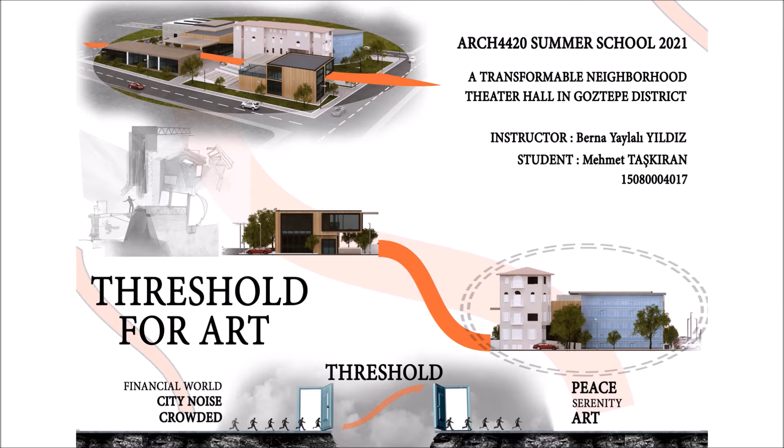Our project this term is a transformable neighborhood theater hall in Göztepe district. The name of my project is Threshold for Art. I prepared two diagrams to better explain the design process and main idea of the project.

The main idea of the project is the threshold. The idea of a threshold is a crossing point or road that connects areas and structures that serve two different purposes or work in two different ways. I used the concept of threshold in this project, working as a transition from Mithat Pasha Street, which is constantly busy, crowded, and commercial, to a peaceful place where art and education are intense, which will be formed together with the theater hall we were asked to design for our space.

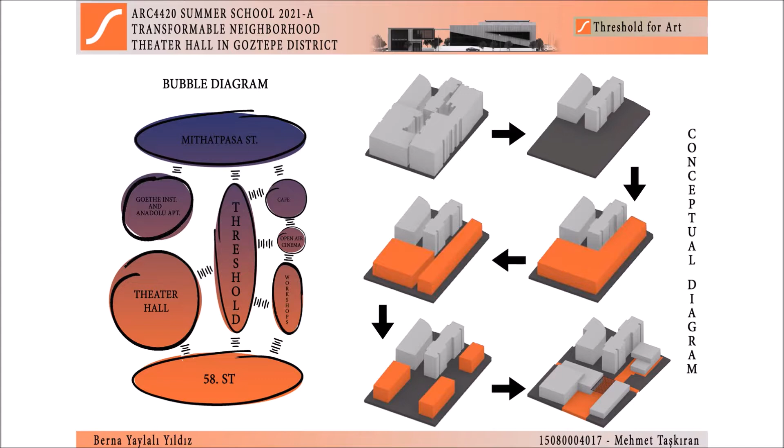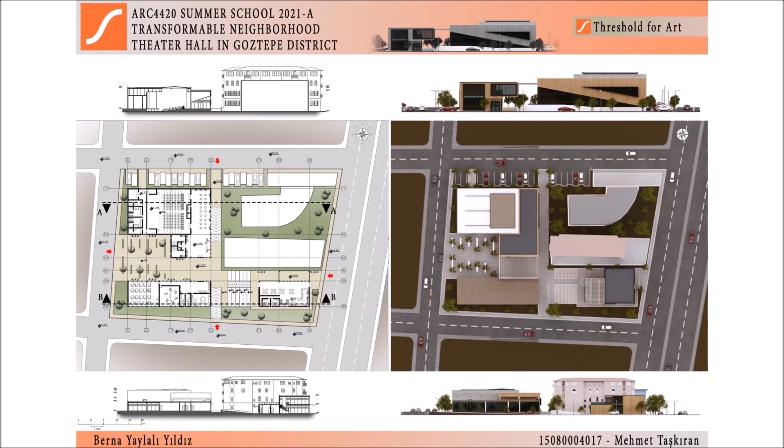I benefited from the analyses and field trips I made while making urban decisions about the project. When we examine the land and its surroundings, we see that the land is costly because it is located at the center of the city and near the sea. This has caused all the surrounding buildings to be multi-story. I also worked on a single floor for the majority of the project, both to break this perception in the environment and because people feel smaller in the city which is rising day by day.

On this slide you see my site plan. Since I don't want any accumulation in a certain part of the land, I positioned the structures at the corners of the land to create defined spaces between them.

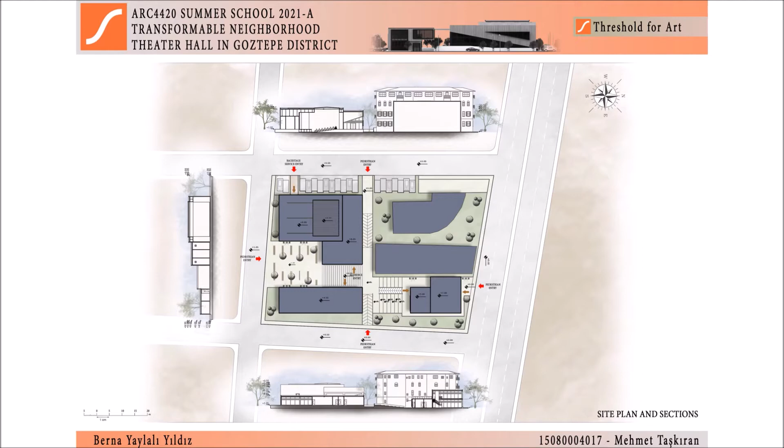When we move to the ground floor plan, we enter the land from the most crowded street around the land, namely Mithat Pasha Street, at zero level. There is a cafe bordering this street, with double entrances from Mithat Pasha Street and from the back for those coming from the theater side. The cafe serves 35 people with an area of 140 square meters on this floor. Thanks to the slope of the land, I placed seating steps at the back of the cafe and created a small open-air cinema by placing a screen on the back wall of the cafe.

The theater and courses are at a 1 plus level. This height is reached by ramps and stairs from three sides of the land. The slope of these ramps has been designed so that the disabled can move alone.

When we enter the theater building, we see the foyer area of 220 square meters. The theater hall is 315 square meters and has a capacity of 160 people. In the backstage, there is a storage room for the props and a service entrance for easy transport. At the same time, there are two storerooms separately for men and women and two player backstage.

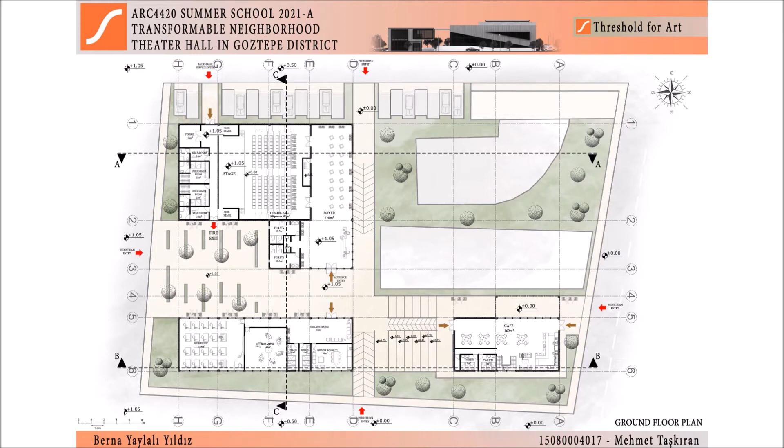When we examine the workshop building, there are staff rooms and toilets at the entrance. At the same time, there are educational course rooms that can be shaped according to the public's use, of 120 and 65 square meters.

As I explained in the part of urban decisions, there is only a first floor in the cafe since I don't want to go up elsewhere. With its terrace, it is 230 square meters in total and can serve 50 people. I also have perspective renders on this slide, so you can better understand the floor layout.

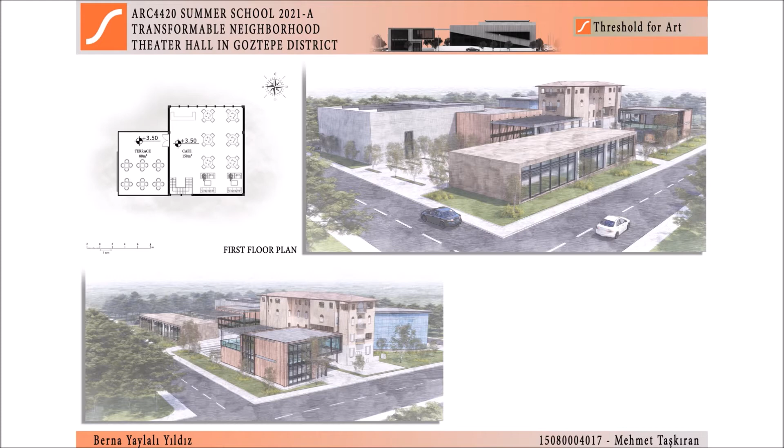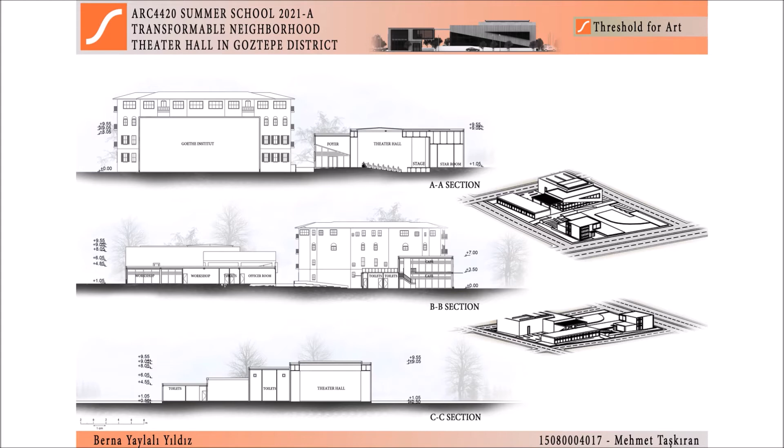When we examine the sections, we get more information about the operation of the theater. At the same time, we can notice the transformable material, which is one of the main elements of the project, in the sections. The situation that makes the project transformable is that the audience part of the theater can be opened when desired. How this works is also seen in the sections.

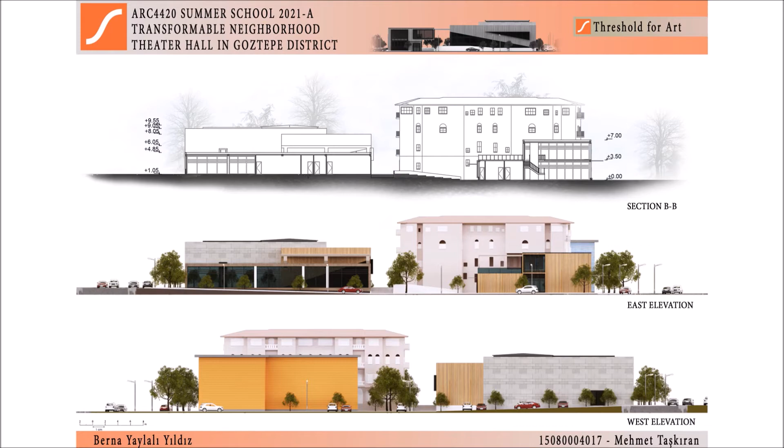On this slide, we see the facades. While doing the facade work, the elements I paid the most attention to were not to be under the shadow of the Goethe Institute while I wanted a modern and simple look, and not to put the Anatolian apartment in the background while trying to be under its shadows.

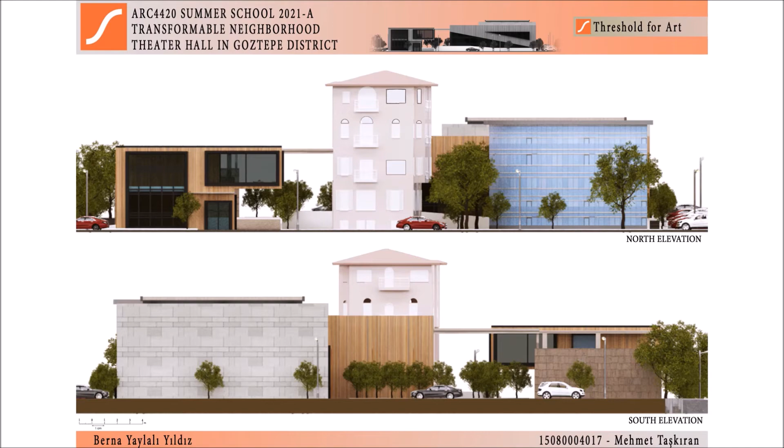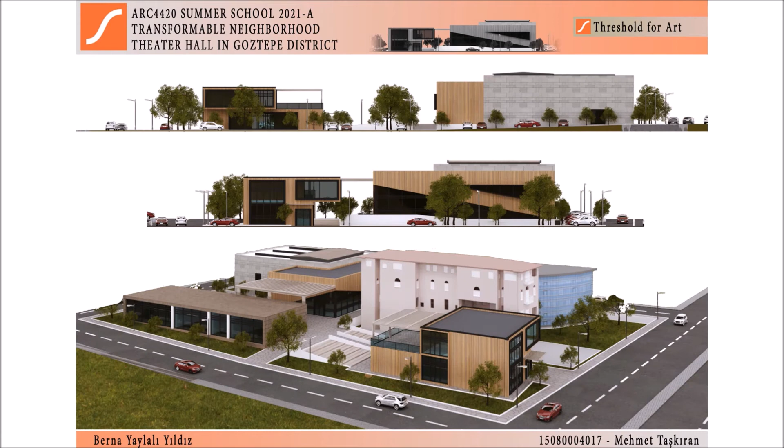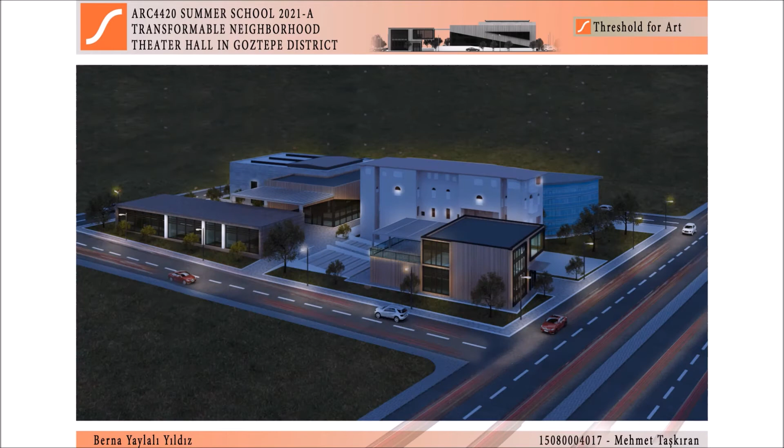We can see the other two facades on this slide. These are eye-level renders. Here too, we have facade renders made by removing other buildings on the site to better understand the facades, along with a perspective render, and finally a night render.